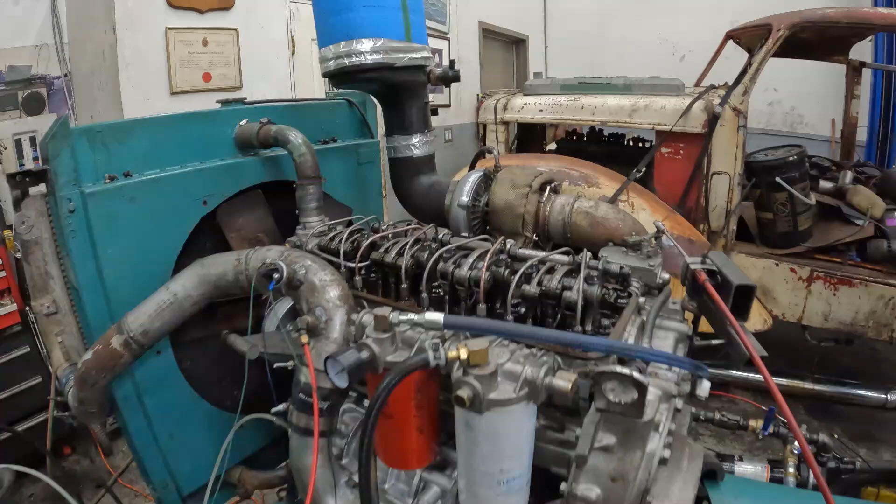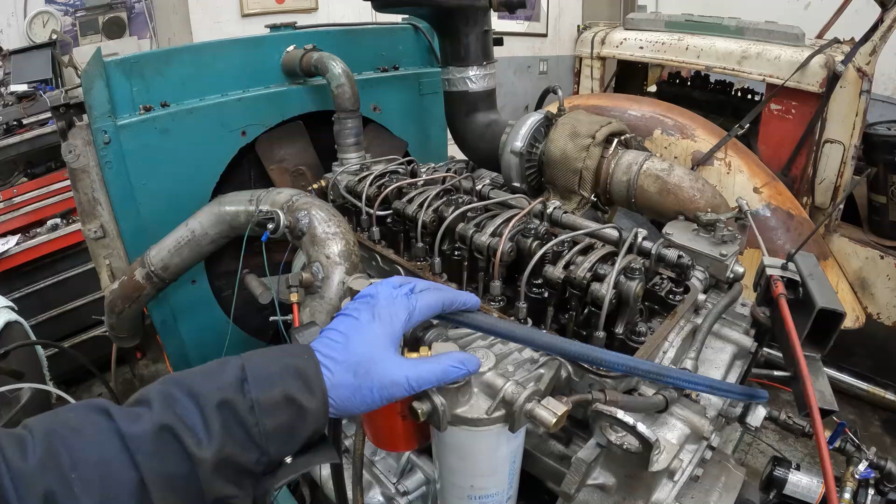Some of you guys are familiar with this engine, and for the new joiners, it's a 1988 Detroit Silver Series 453T, and we're trying to squeeze as much power out of it as we can with 90 and 100cc injectors. So at the moment we've got 9G90s in it, and I haven't dynoed it with those yet, but we'll do that on the weekend.

And then on the bench I've got a set of 9200s. They're 100cc injectors, and I think that might be the last injector in the test. My goal is to get this nearly smoke-free. The 9290s I tested just recently were almost smoke-free, really good. So with a bit of tweaking, I can get those cleaned up.

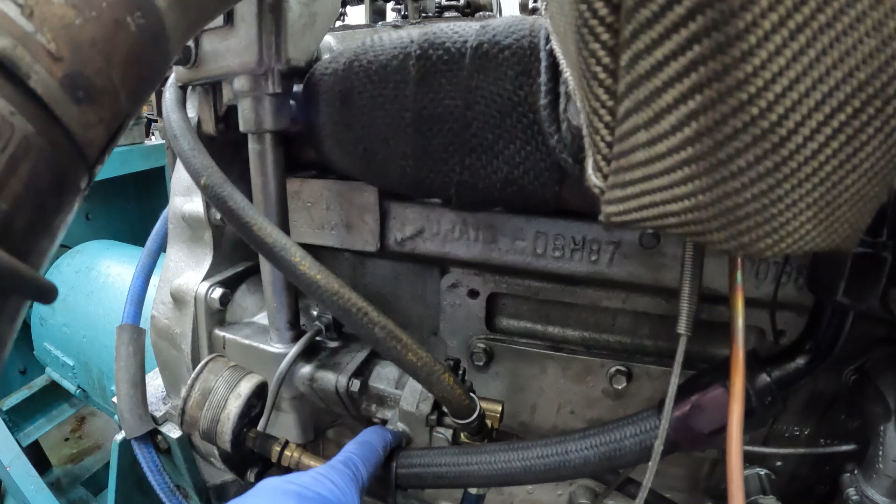Anyway, so a basic overview of how this system works. There's an engine-driven fuel pump on this side here. I'll show you that in a sec. So it draws fuel through this 25 micron filter. It goes through the line to the pump. And on the back of the governor is the fuel pump, and then it goes in the intake here,

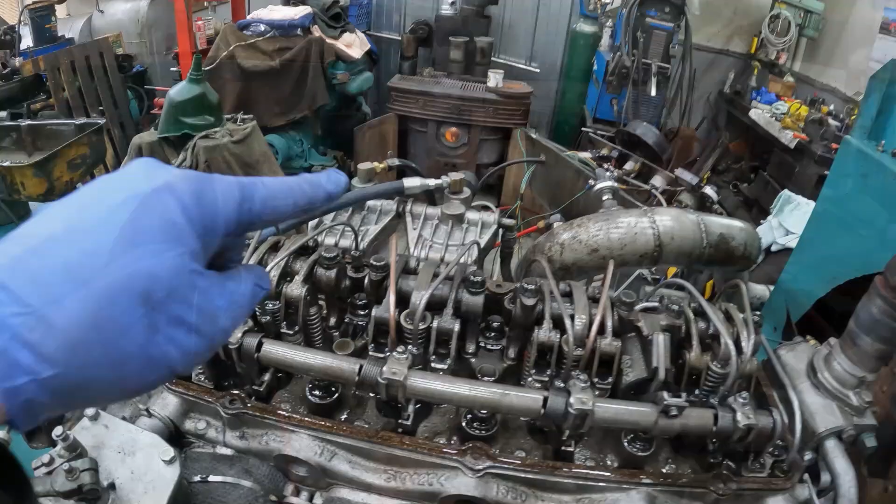and then from there it's pushed out at about 60 to 70 psi back to the secondary filter, and then from the secondary it goes into an inlet here, if you can see my finger, and that is the inside of the head for the fuel delivery.

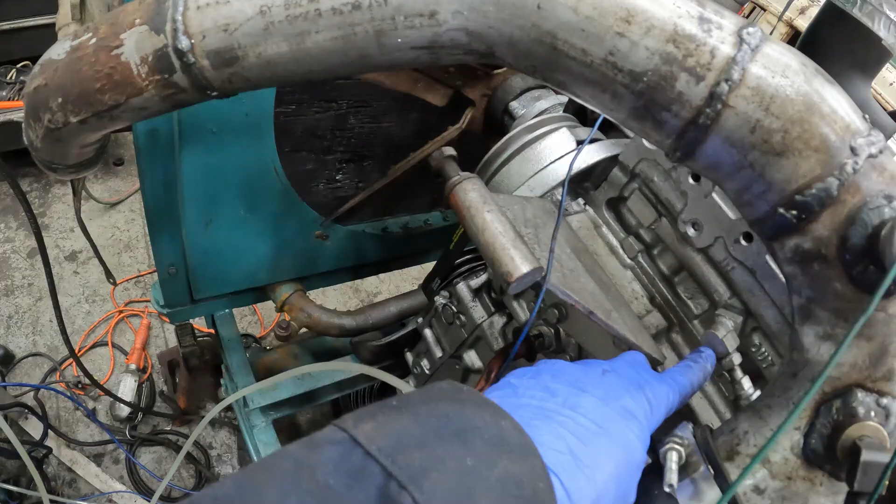And then once the fuel comes out of the injector and back into the fuel port, it comes out this fitting here, and it has a 0.080 inch restrictor on it. So by having that, it keeps the fuel pressure up to 60 to 70 psi. So out of the fitting here and back to the tank. So that's how that system works.

Fuel flow through these injectors is a gallon a minute, so 60 gallons an hour, and that keeps the manifold, if you want to call it that, pressurized, and the injectors cooled. So the fuel comes in this inlet here, and it comes in here into the injector. Whatever fuel's not used comes back out to the return, and then again through here, and then out the hose.

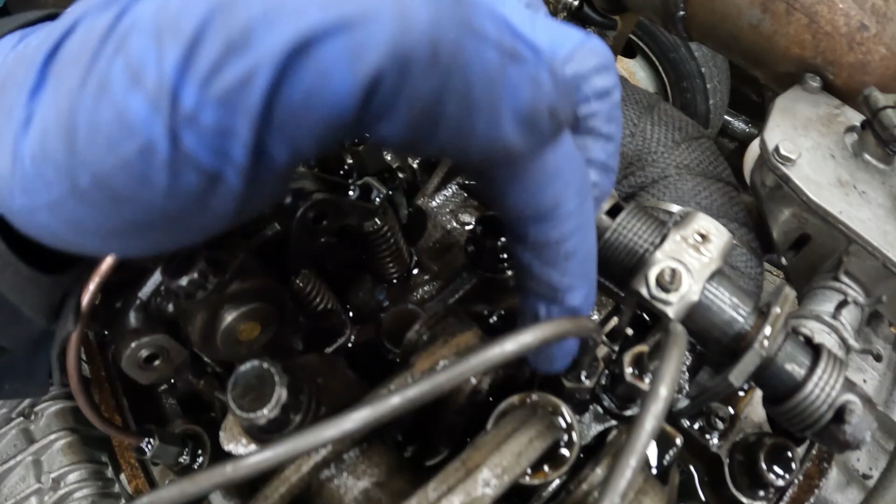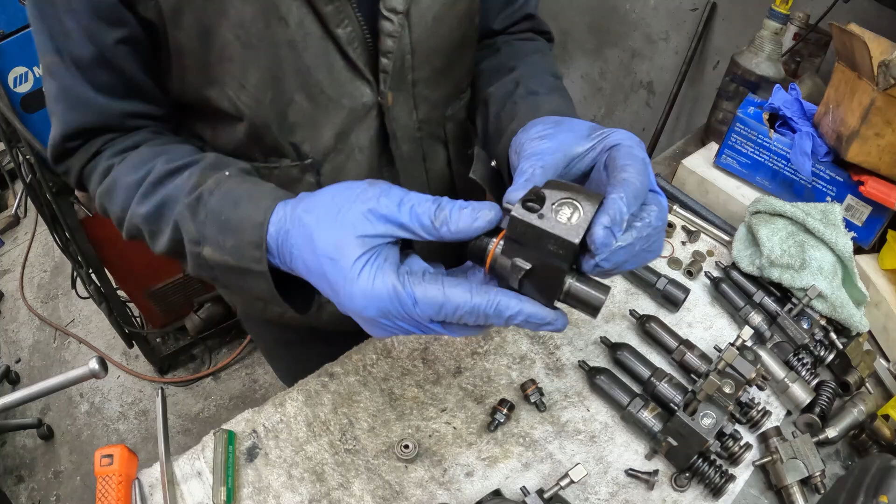All right, there's the injector there, and that's the plunger, the follower here, and that's how the injector looks in the head. I'll go show you guys the injectors now. All right, so here's the body of the injector. Super simple. You've got your plunger here, well, your follower I should say, and the return spring, and that goes in here like that. Don't worry, I'll go through a more detailed explanation once I pull this other injector apart, but this is just a quick overview.

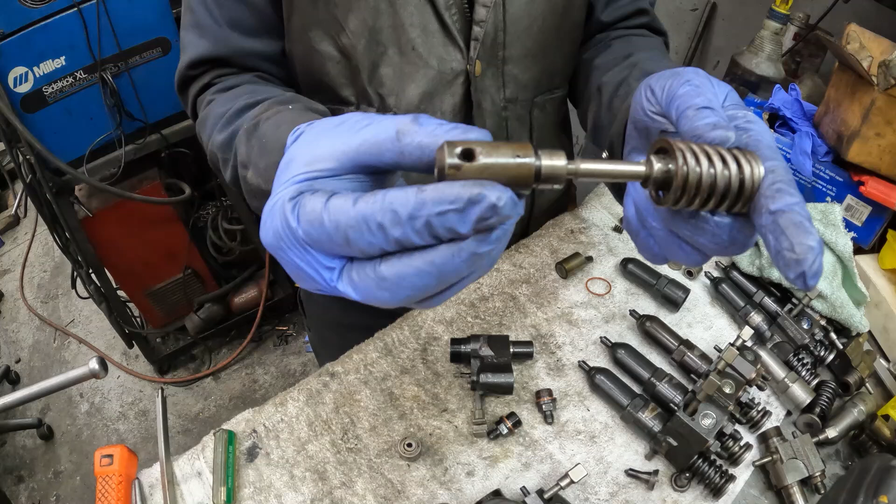So you have your spring that hooks to this, and it pushes this plunger in and out like that, up and down as the engine rotates. The camshaft in the engine pushes on the rocker, and then the rocker pushes on this, and it goes up and down. All right. So there's 2 passages in here. One is for the feed and one is for the return.

So the fuel enters here, and it goes through just a very rough metal mesh. I don't know how many microns, but it's just a garbage collector, making sure no big chunks get in there. All right, and then it runs down through this port here, down into the injector. Already lost some parts here. And then this sits up against here. And you have a lower port and an upper port. And this is all cut. It's called the helix of the injector plunger.

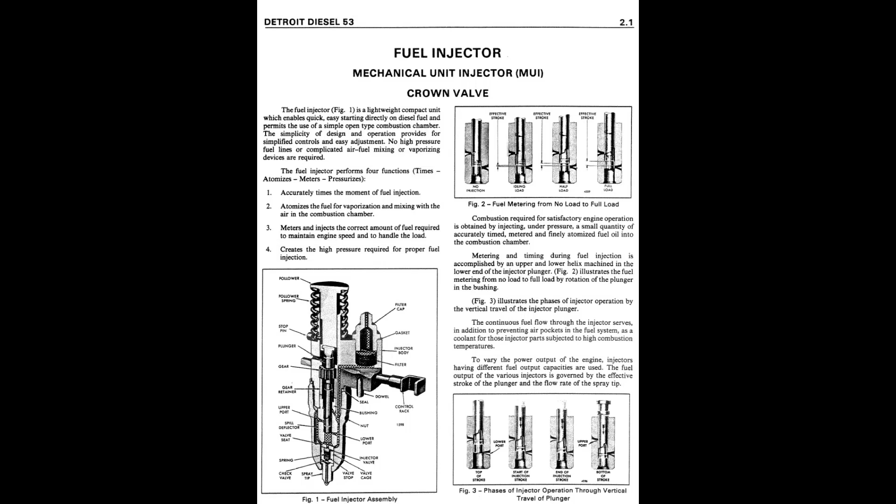Then it pushes down on this spring, and that in turn seals this whole unit off, and then pressurizes fuel into the injector through these small holes. As soon as the fuel gets pressurized, it lifts this little needle and sprays through the tip of the injector.

These injectors are all different depending on, again, the model, the amount of fuel required, and so on and so forth. And that's the basic operation of these injectors. They atomize the fuel depending on the spring as well. There's a 3750 valve opening pressure spring, and then the normal one, which I think is about 22 to 2700 psi. And that's how these operate.

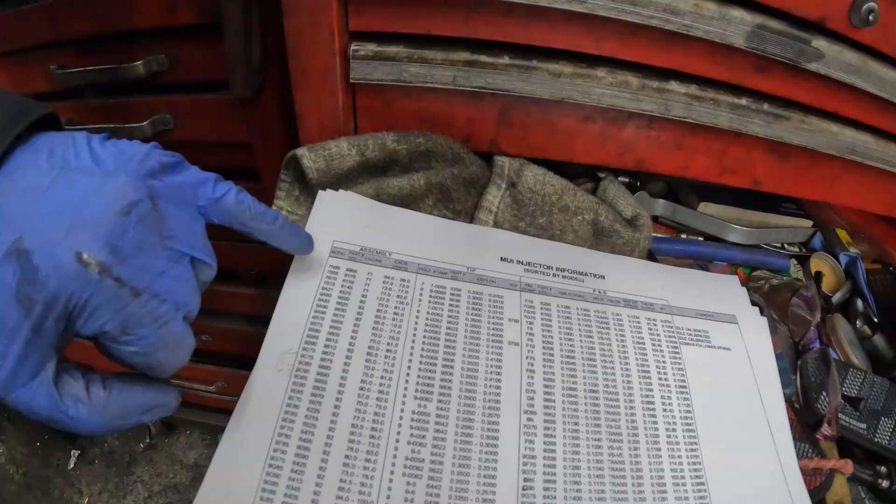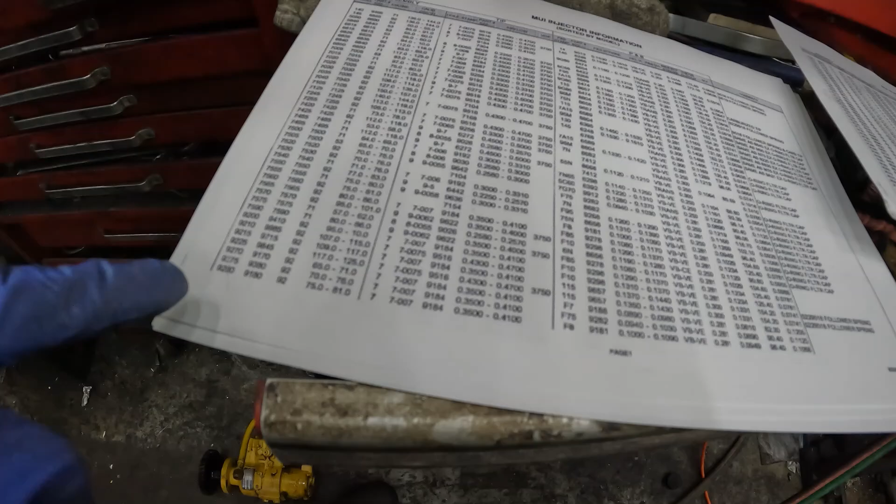Here's the list of all the different injectors. And this is what I go by for building and ordering parts for these injectors. I just get the part numbers on these, and I order the parts. So if I have a faulty tip, let's look at a 9200. So there's the 9200, and it requires a tip of 7-007. So 7 holes at 7 thousandths of an inch.

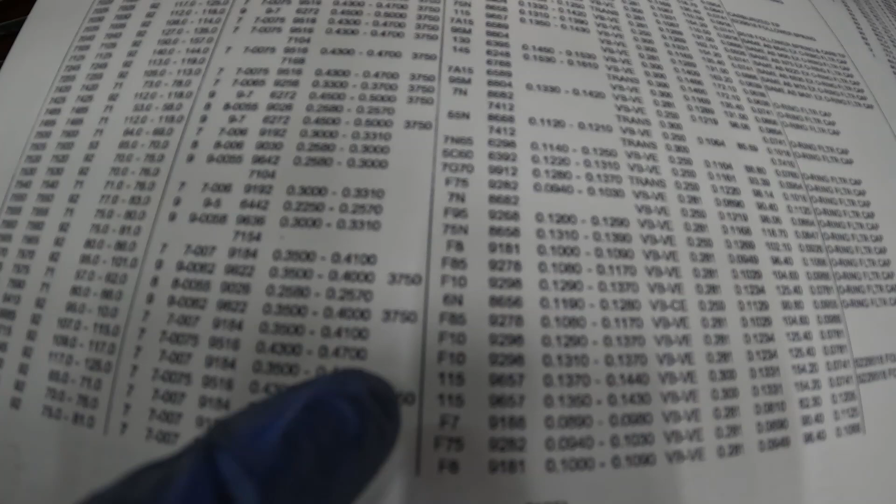And it gives the valve opening pressure here. Well, if it's not 3750, like I mentioned earlier, it'll be like the 22 to 2500, something of that nature. I'm going to build up an injector to test popping pressures of these so I can know that.

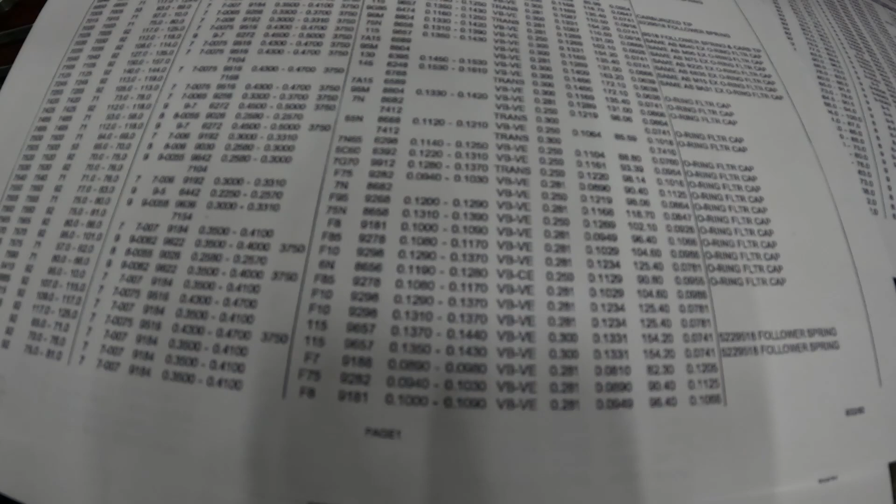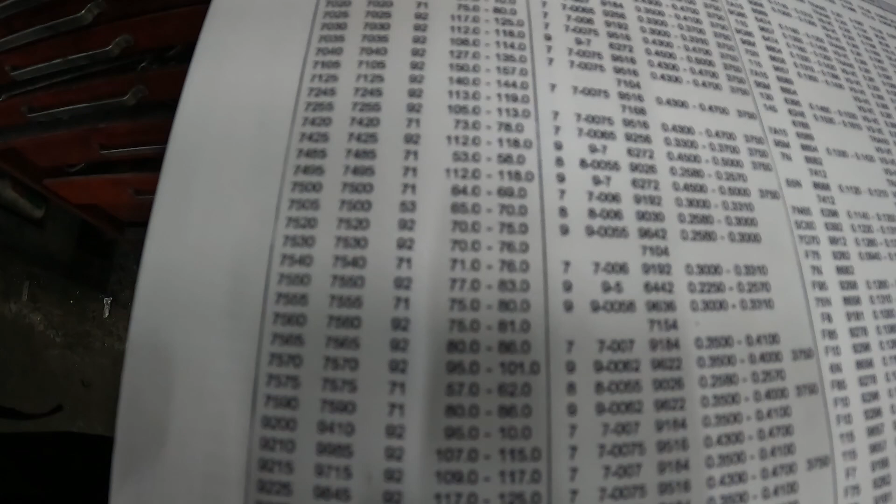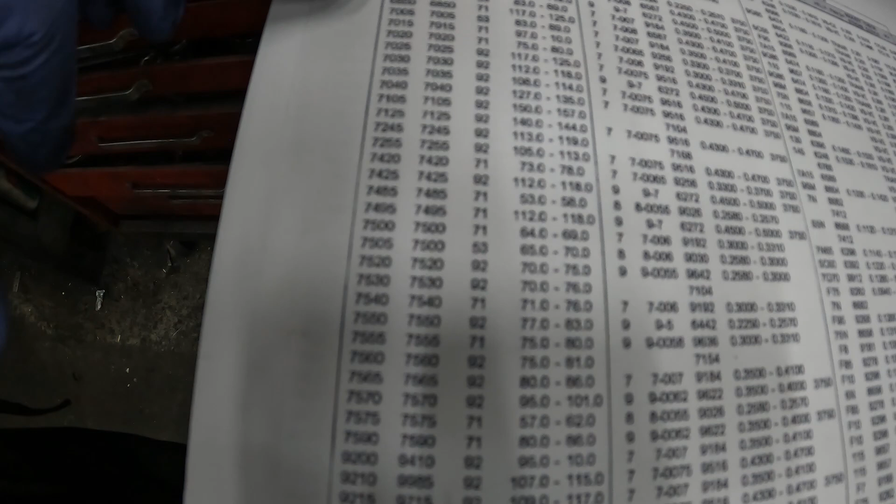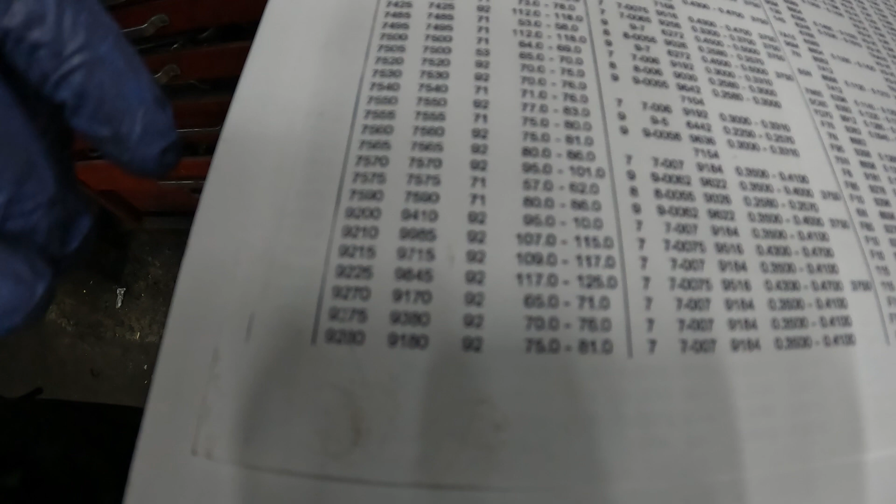So the 9200, it lists 92 series, right? The 9 means 92 series. The 7, 71, and some of the 7s are 92 as well, and 53. So it's not necessarily number specific for the model. Generally speaking, the 9 series is for the 92, the 7 series for the 71, but as you can see, there are some 92, and let's see, is there a 53 in there? Yeah, 7505 is a 53.

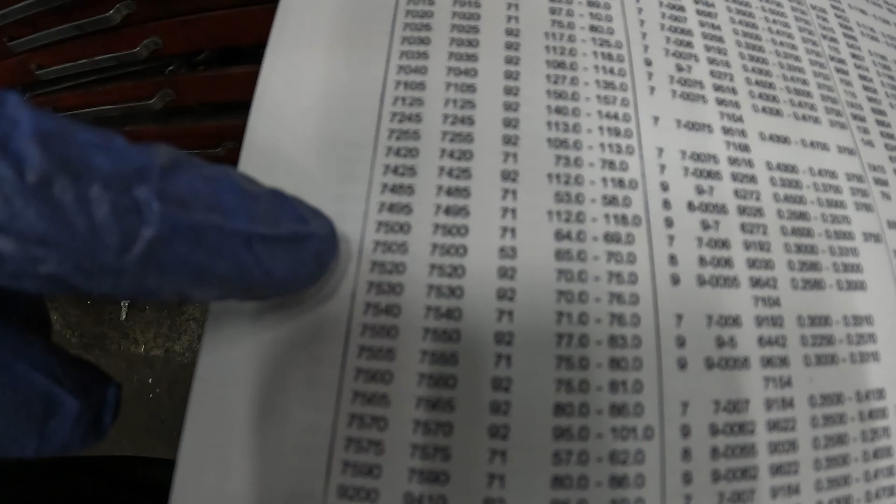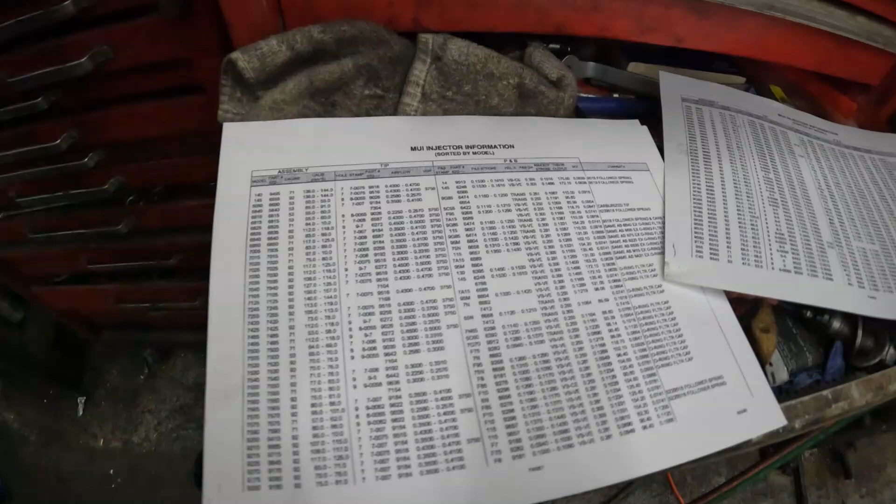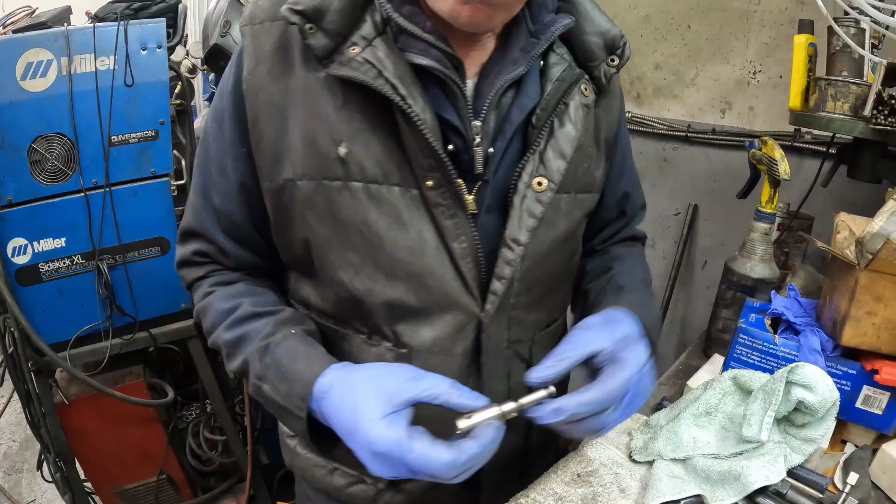Okay, so there's literally thousands of different injector combinations. These plungers and barrels, here's a 35, an N35 out of a 253. It's 35 cc's. So here's the bigger 92 series injector plungers and barrels. There's the old 35s. As you can see, this here is a much larger injector to get more fuel into the combustion chamber, I suppose you call it, delivery chamber. So again, these get bigger with the bigger injectors.

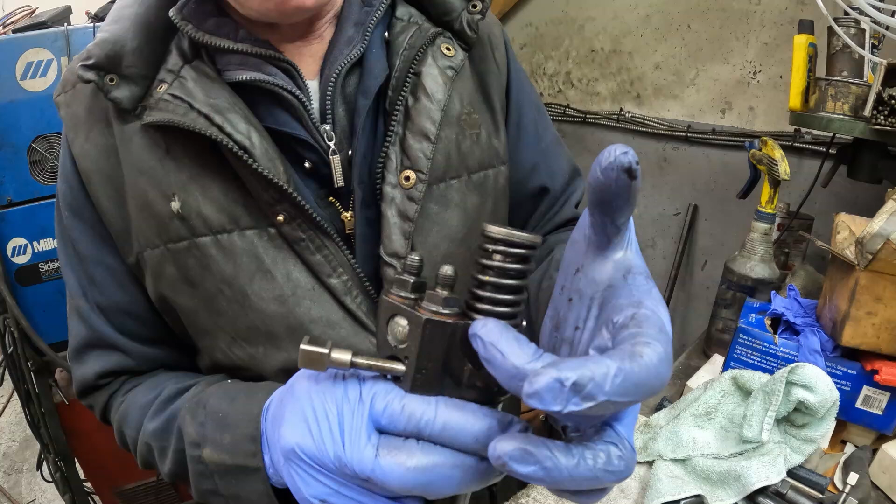So for timing these injectors, the rocker pushes down on this follower. So when it's in the engine, you want to time it, you get your tool out and you can time it here like this. This is the timing tool right here. And you've seen me in other videos timing the injectors. This sets the height of the injector. The higher the height, the more delayed the injector is at delivering the fuel. The closer down it is, the more advanced it is for delivering fuel.

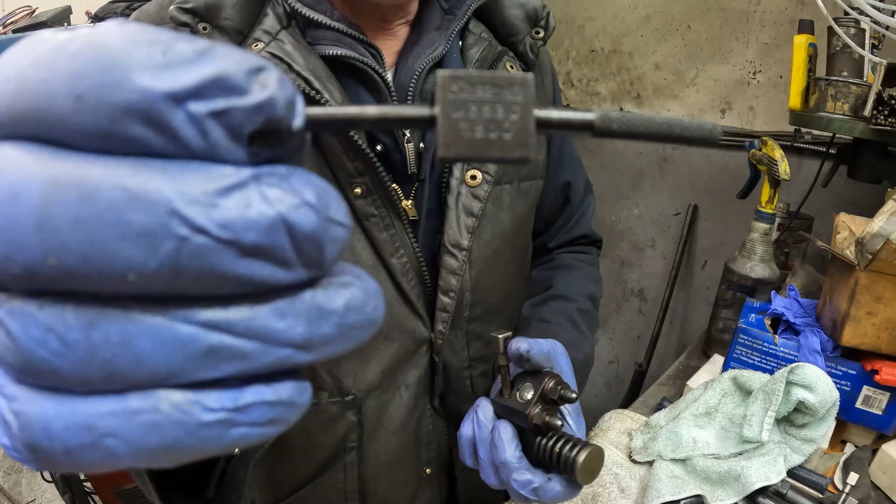All right? So if you look at a 1.5 inch tool, I don't know if that's going to pick it up, but the 1.5 is longer here than the 1.484. All right, so that's how you time them, just with this little tool.

So here's that tool I talked about. It fits in a hole in the injector body, and it's just a depth gauge. That's all it is. And you run it along here, just rub it on the follower, make sure it's just touching, and that's all that is. And then I know this injector is timed correctly.

To control the fuel, you have this little unit here, the rack, and all the way in is full fuel, and all the way out is fuel shut off. A little bit like that is idle. That's half throttle, 3/4, full. And what controls this whole thing here is the governor.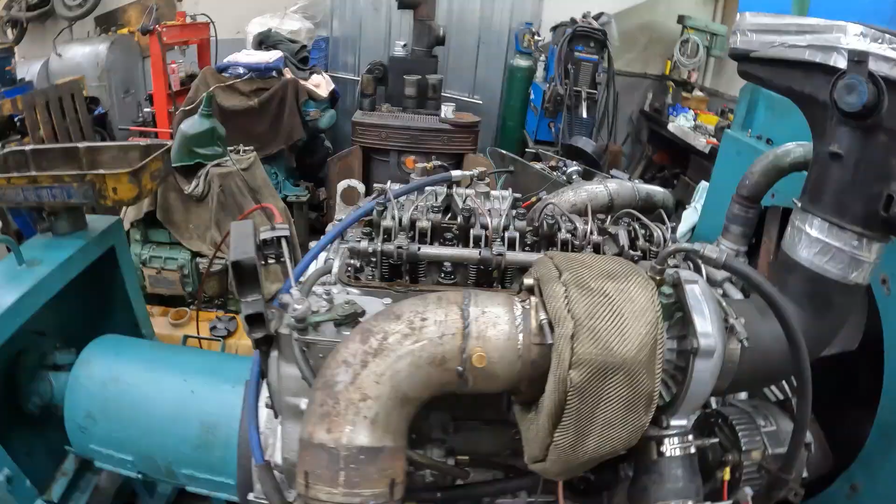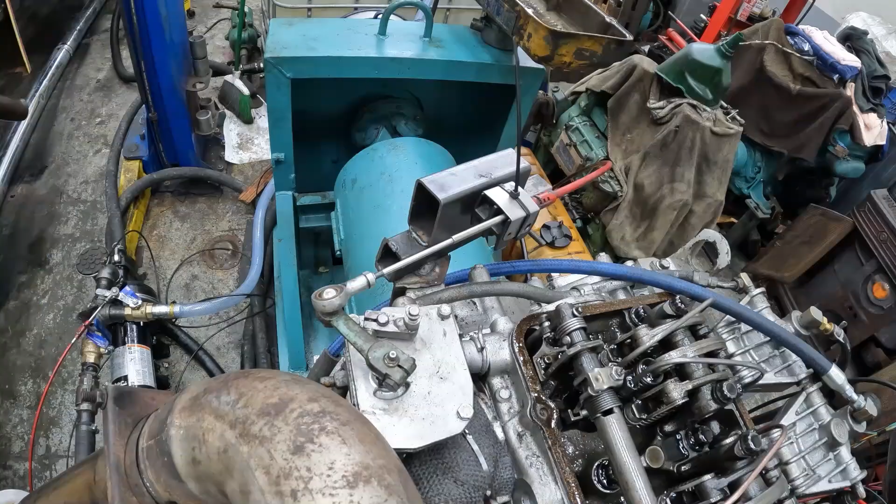So I'll show you that now. So here's the governor. It's just a gear-driven governor off the accessory gears. That's super simple. You got your on-off here, and then you got your throttle control. You won't see much throttle control because the engine's not running. So right now, the engine's at idle.

All right, as soon as I do this, it's going to pull the throttle back to fuel shutoff. You look at these little fingers, they're going back to idle shutoff or fuel shutoff. All right, and that's how that works. Just that simple little control.

So full fuel demands, you see this moving? Demands the rack go full fuel, and what controls it from a runaway is this governor. The weights fly out, apply force, and bring the fuel back automatically inside the governor to control the rack.

All right, and that's how the speed of the engine's governed out at whatever you set it at. This one now is set at 2800 RPM. So with no load on, when I go full fuel, the engine revs up to 2800.

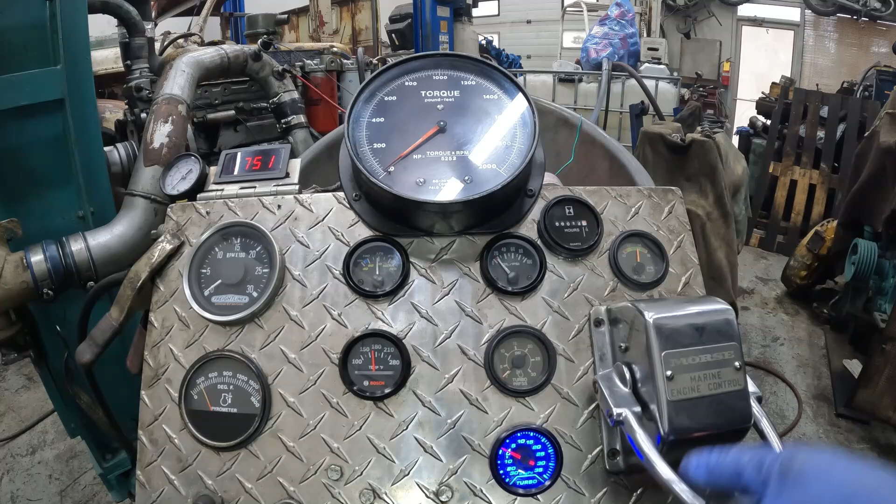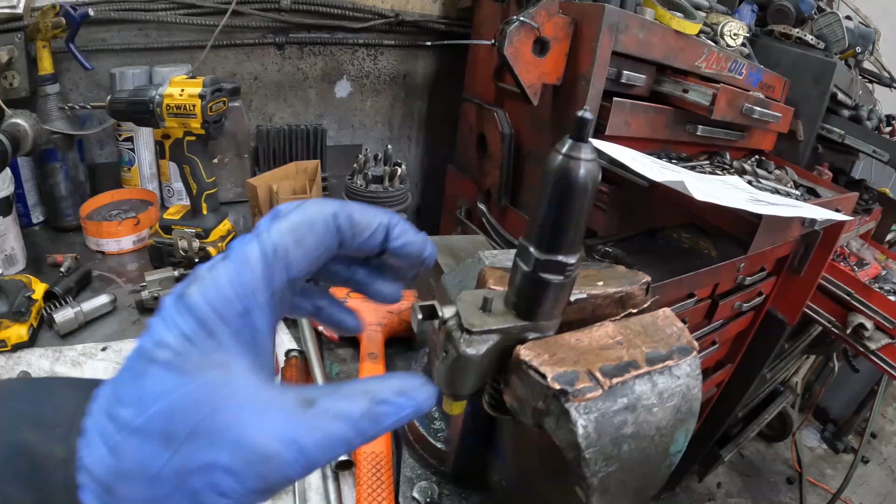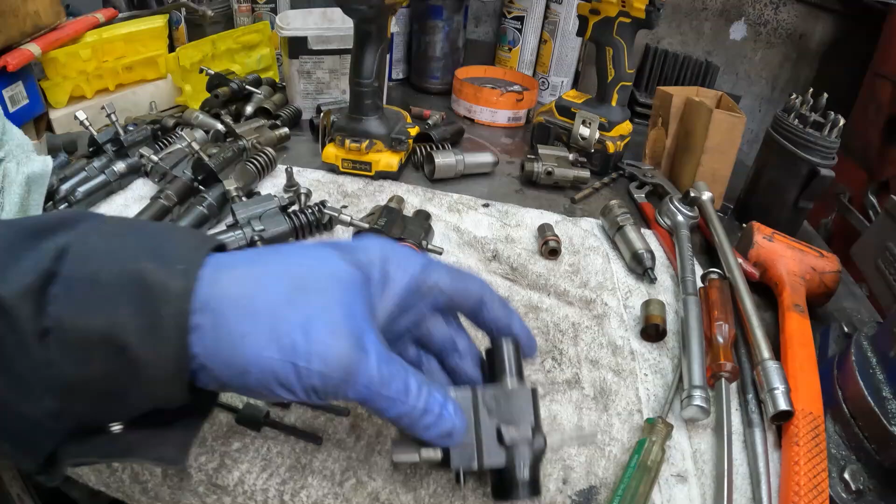What I'll do, I have to steal the internals out of this unit and put them into, I can keep track of this stuff. I'm going to build this injector now. All right, I had to steal parts from this one to make these, the 9E85s to test. Okay, so bear with me, I'll get this set up and we'll take this injector apart.

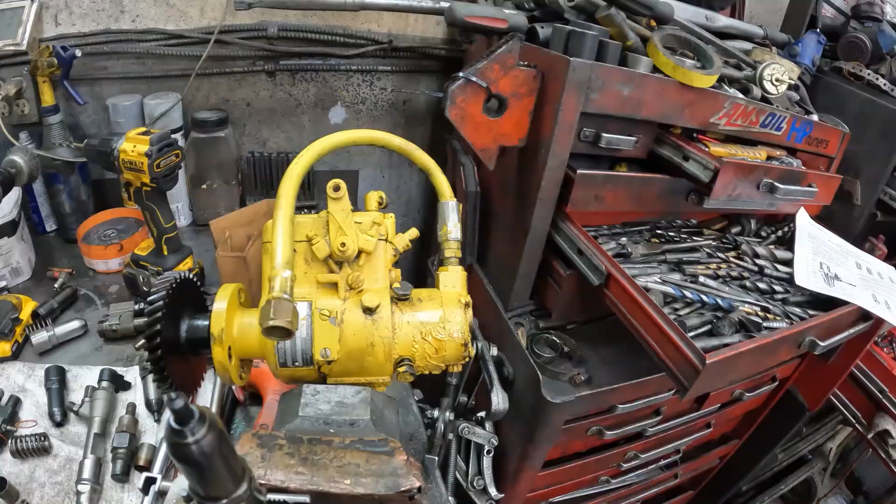On Cummins, Mercedes, well, you name it, almost every manufacturer either has, in the day when Detroit had these mechanical injectors, mechanical unit injectors, other competitors had, like Roosa Master on their lineup of engines, like Buda, Perkins.

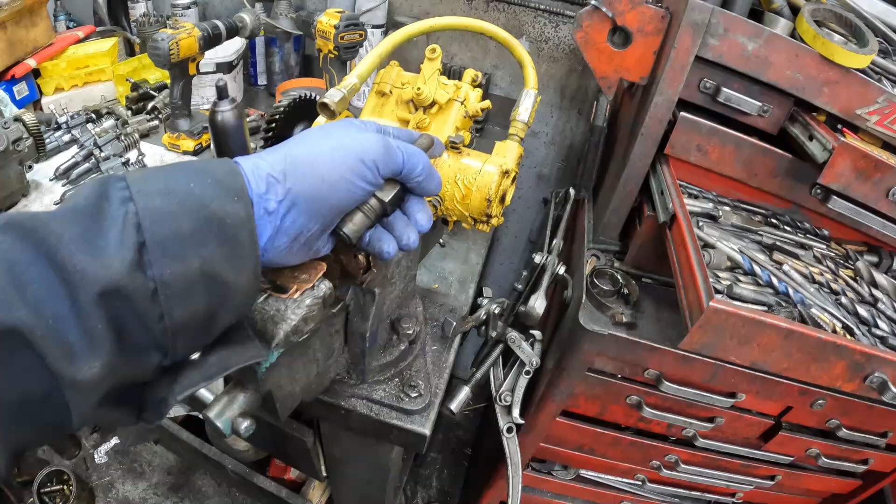This rotary pump was used by Bosch as well, and it came in the Cummins and all kinds of different engines. They also had a P pump that was like a piston pump. Bosch made those, and they made them for Mercedes-Benz. So this is an injector out of an OM 621 Mercedes, and you would have had your P pump with injector lines delivering fuel in here, and then the return came out of here through a little manifold.

So the pressure was developed from that pump. So you had all these items, whereas the Detroit just has this unit, does everything.

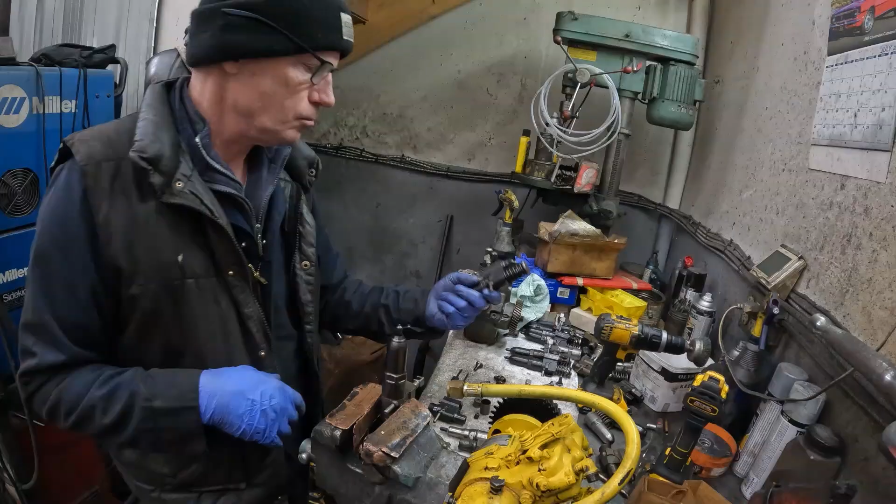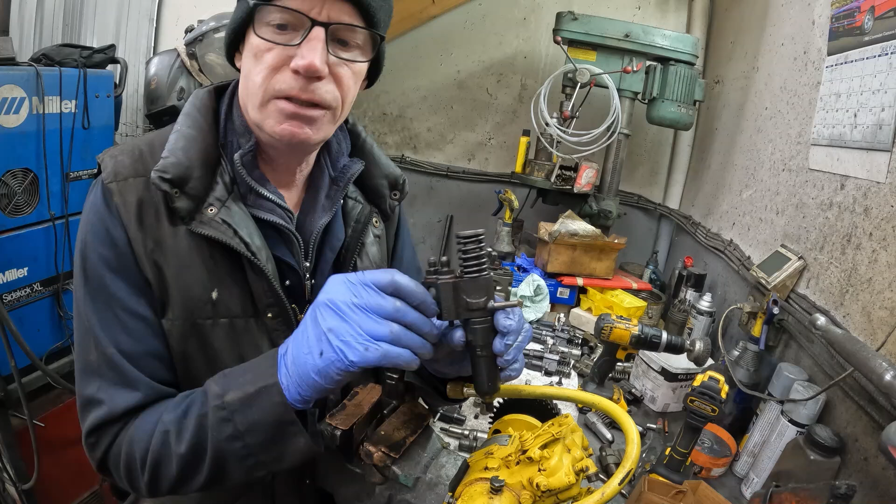So Detroit ran these from the beginning of inception in 1938 right up until the end on some engines, until they stopped making them. And in the mid 80s they upgraded this mechanical injector to an EUI, electronic unit injector, and they basically got rid of this rack system and they put electronic controls in here, and they called it a DDEC, which is a Detroit Diesel Electronic Control. It was the early version of the common rail, if you want to call it that.

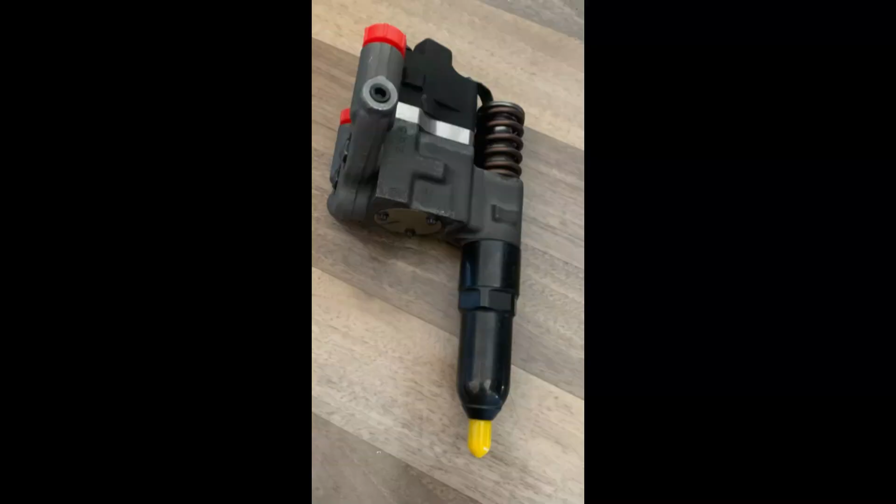Very simple, same delivery system. You had that engine-driven pump delivering 70 psi. You still had these units here taking in the fuel, but what controlled the throttle, governed the throttle, was an electronic device inside. Unfortunately, I don't have one to show you guys, but that's how that worked.

Later on, the four-strokes came out in the early 90s, and they incorporated the DDEC into the Detroit 60 and the 50. Those turned out to be really good engines, and then they phased out the two-strokes due to emissions, basically. They just couldn't clean them up.

So the 60 series had that DDEC, and then they came out with the later models with the common rail. I believe Mercedes-Benz owned them at that time and revamped the whole thing. Came out with a whole new engine, and that's what's on the highway today, the DD15 and 16 and other variants. They're common rail now.

So back to Detroit 60s. After they used their useful life, again, EPA emissions demanded cleaner emissions. So they went to the high pressure common rail system, just like everyone else did. Every manufacturer now that's still in business making new engines has a common rail system. That's just the way it is.

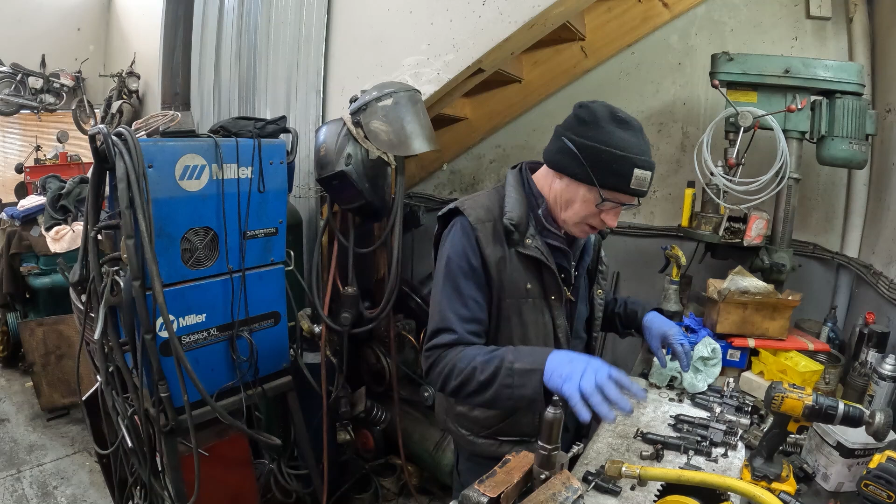So I'm just keeping mine simple. I'm going to try to squeeze out 275 to 300 horse and leave it at that. I'm happy with that. I'm very happy with the 9290s. They were awesome. So we'll see how the 9G90s go. I'm pretty optimistic about those. So let me pull this thing apart. I've just got to tidy this up so I don't mix all the parts up.

So we're going to take apart this 9E85. It's an 85cc injector. And we're going to build a 9200 out of it. Alright. The only difference was the tip. Smaller tip, but it uses the same plunger and barrel as the 100cc injector. And that's another thing I like about these injectors is I can repair them. With these modern injectors, I can't. These injectors are very simple and very forgiving.

So there's the interior of it. And I'm just going to screw that right back on this injector I stole it from. See? I've already run the engine with this injector in it. A modern system would not tolerate that at all. See, that's a little bit of scaling from sitting. Anyway, we're going to put that back in there. I've stolen the caps out of it. So I know it's basically unserviceable, so I have to go through it and make sure it's okay if I ever want to use it.

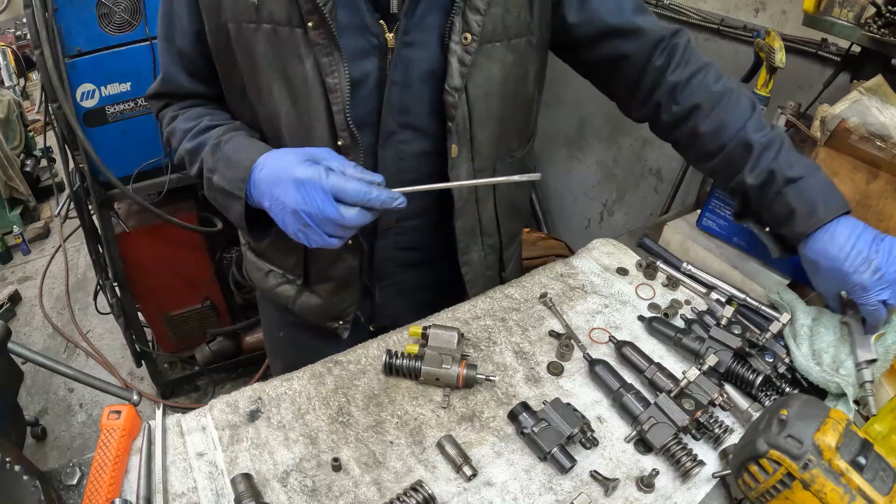Okay, we're going to pull the keeper pin out. Clean up some of this stuff here. Simple as that. Just pull that pin out and the whole thing comes apart. We'll set it right down on that. All I'm going to do is transfer that into here. Okay. So I'll put that over here.

And I'll pull this little piece out. So you see the little gear set? That's what controls the movement of the plunger. So that simply just drops out like that, and now comes your rack, and then you're down to the bare body again. And that goes in there. I'm just going to blow this out with clean air.

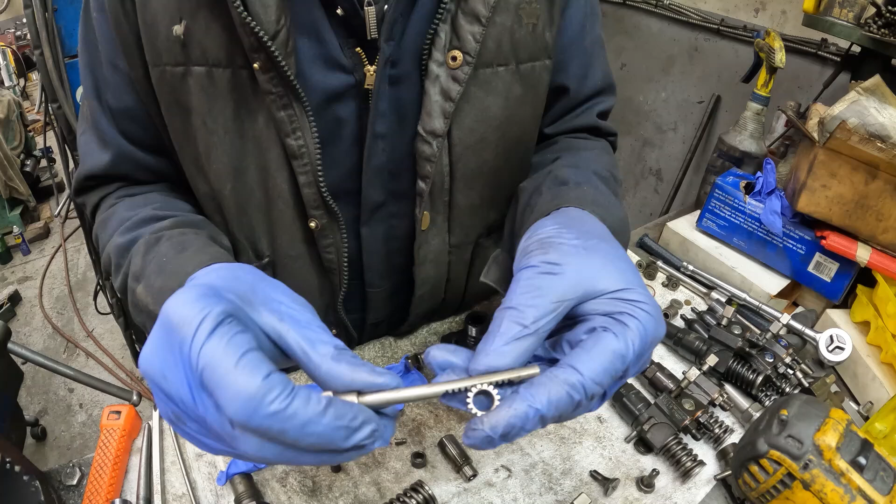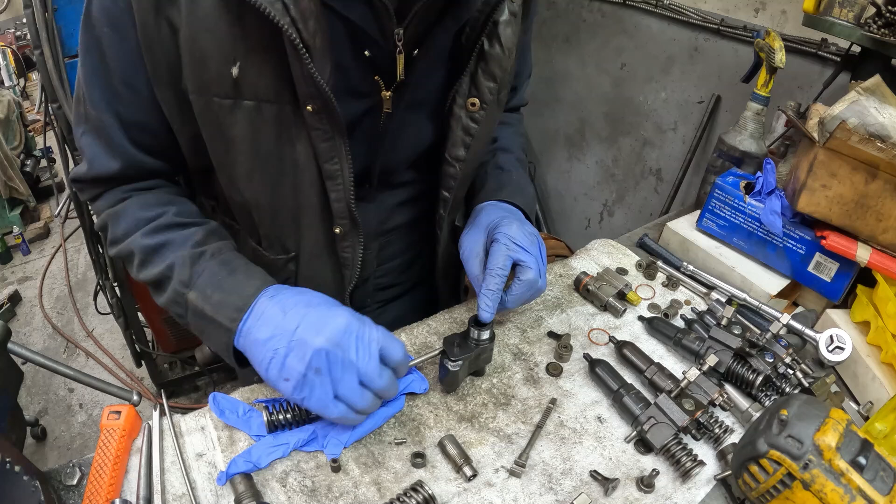So on the rack, it's got the gears. See that? They line up with this. So we're just gonna drop this back in. Now I've done a video on this before, but being you guys keep asking me about it, I'm just gonna make another one. So you gingerly drop that in. Make sure it's timed.

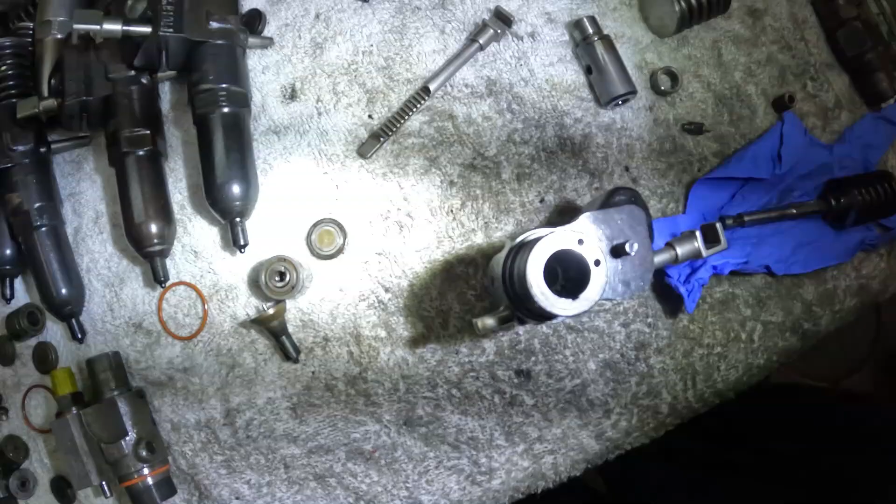All right, with any luck the camera picks that up. So you know that's timed correctly. If you get that wrong, the engine's never gonna run right. Then that collar falls back in there again. Then we put the barrel back in.

And then I confirm before I fit this back together that this is an F10. It says F10 on it. Then I know it's the correct plunger and not an F9. An F9 is the 90cc injector. I'm going to screw the body back down on here. So I'll need an O-ring. Make sure I've got the right tip. It's a 7-7.

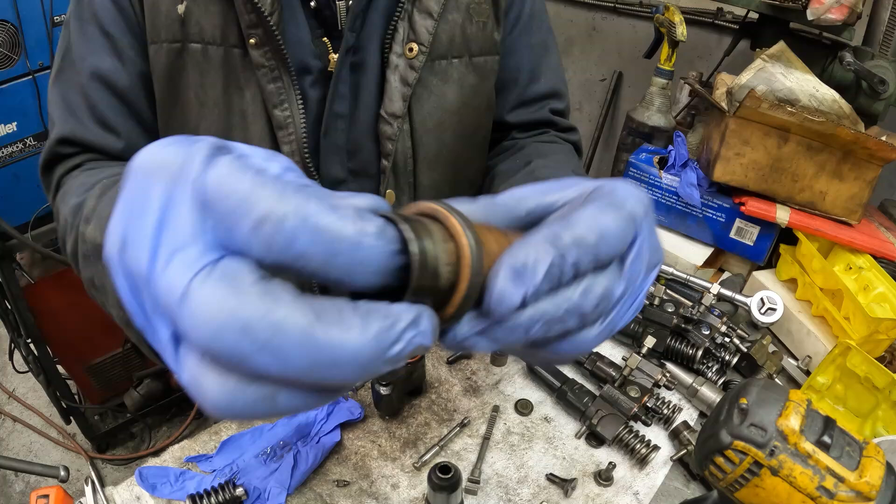Oh, there's one more thing I want to show you guys. Just give me a minute. So here's the tube, the injector tube that's in the head. The injector seals into this. Can you see inside that? It's tapered exactly to fit this. And that falls in there like that and seals at the bottom. I'm not going to push it all the way in or I won't be able to get it out.

But these two pieces are mated to each other. And this goes into the head, seals at the top and seals at the bottom. And then is cooled with engine coolant. There's no seal like on a Bosch, like a Mercedes-Benz or a Cummins or any other manufacturer for that matter. This one here had a little disc that went in and that's what sealed it in the pre-cup. So it's direct injection, not a pre-combustion system.

So this one here happens to be a Detroit tip, which I like to see. So this is how that goes together, and then we put the coffee can over it. Like that. The spill deflector, I think they call it. And then we stuff it in there like that. Then I don't lose anything. Then I'm going to screw this back together. All right.

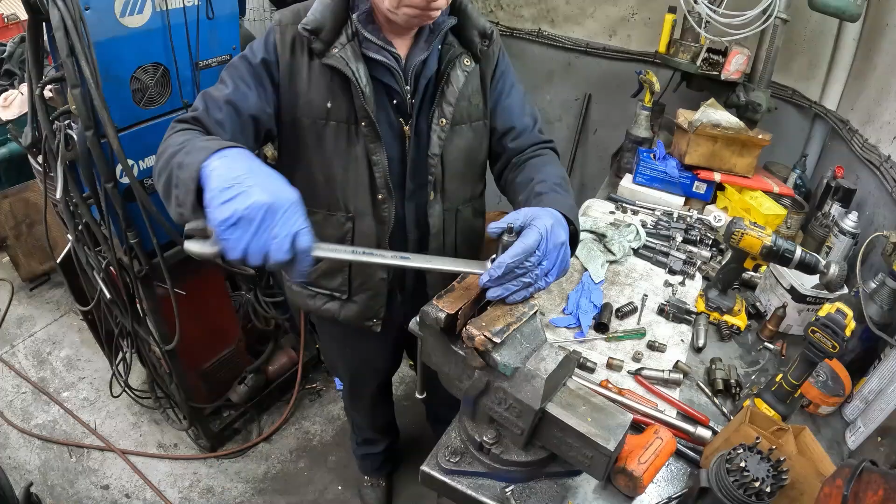See if I could do this without putting it in the vise. There. And then make sure it's locked. And that's an assembled injector, believe it or not. So what we're going to do now is we're going to bench test it and make sure it sprays. So let me tighten this up first, and then we'll bench test it. All right, after you've torqued it, everything should be really nice and free. If it's not, something went wrong. See? See the rack move like that? That's how it should be, all right?

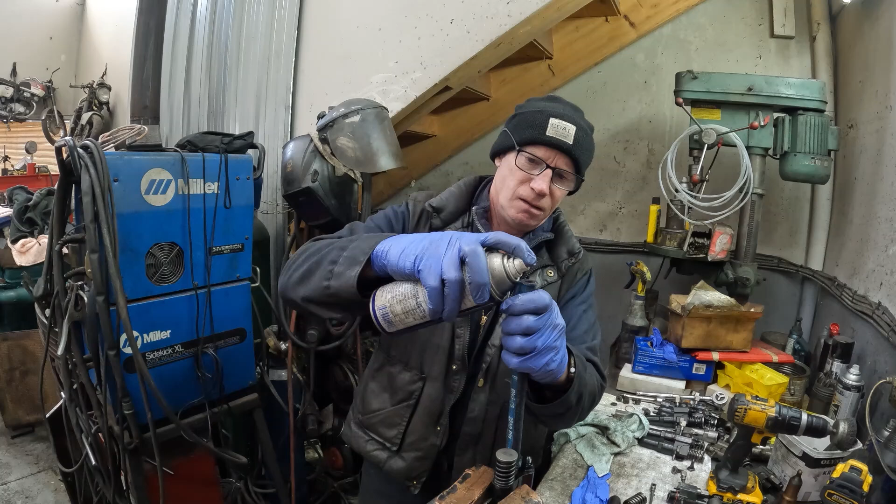So now we're gonna prime it, and I say bonk test it. Bonk, bonk. Got my trusty test tube. We're gonna use just WD-40. So Jimmy doesn't care if it's WD-40, if it's diesel. We tested this tip. It's no good. So, see that? That's no good. We're gonna have to find a better tip. Not to worry. I'll show you what a good injector should spray like. There, that's better.

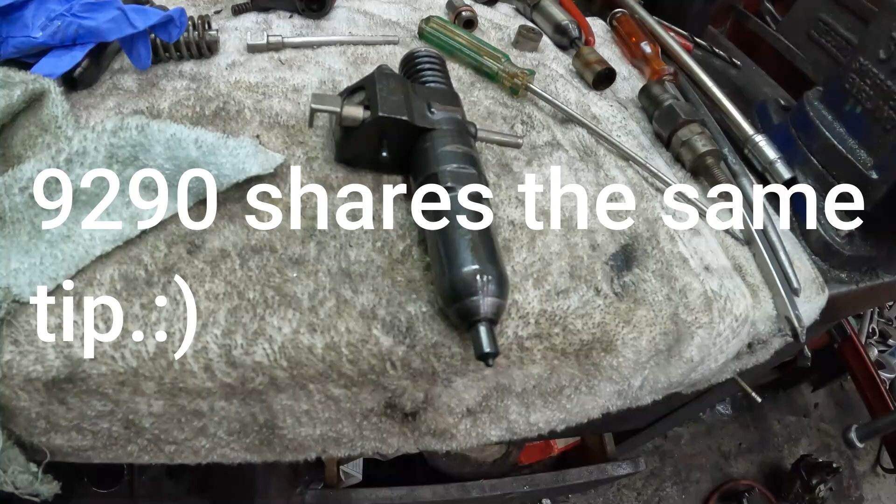So that's the injector complete. I've got to take this tip out and find a good tip. And let's hope I can find one, otherwise I have to order one. But I have confidence that I'll find one. Well, there you have it, guys. That's an overview of the injection system on a Detroit two-stroke. They're all the same. They all use that system. So once you know this one, you know them all, basically. Super simple and really nice. Once you get used to them, they're really, really nice.